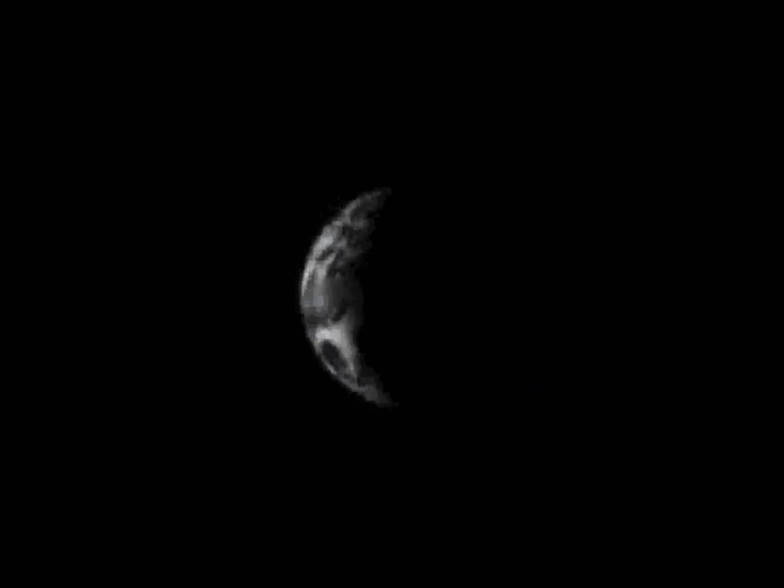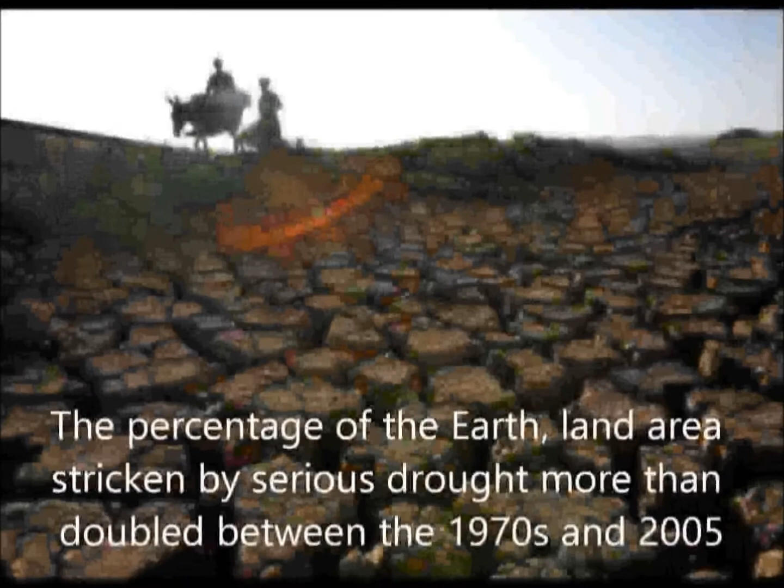Only 1.4 billion people have no access to clean fresh water. The situation in Africa is much more critical. In Africa it can be 4 miles to reach a water source. Africa is considered the most arid continent. African deserts make up more than 25% of the geography in Africa.

Mention the oldest desert in the world. The Namib Desert. The Namib stretches for more than 2,000 kilometers along the Atlantic coasts of Angola, Namibia, and South Africa. It has less than 10 millimeters of rain annually. Complete aridity is the best description for this desert. Obviously life here is too difficult.

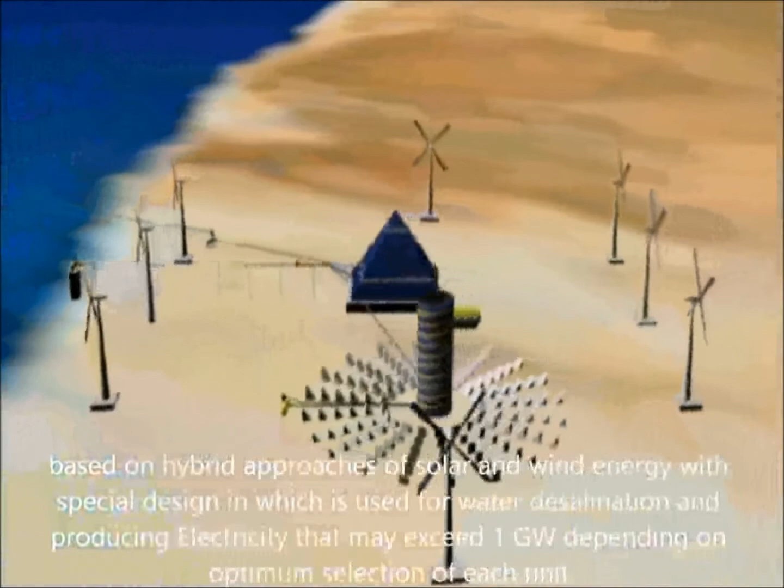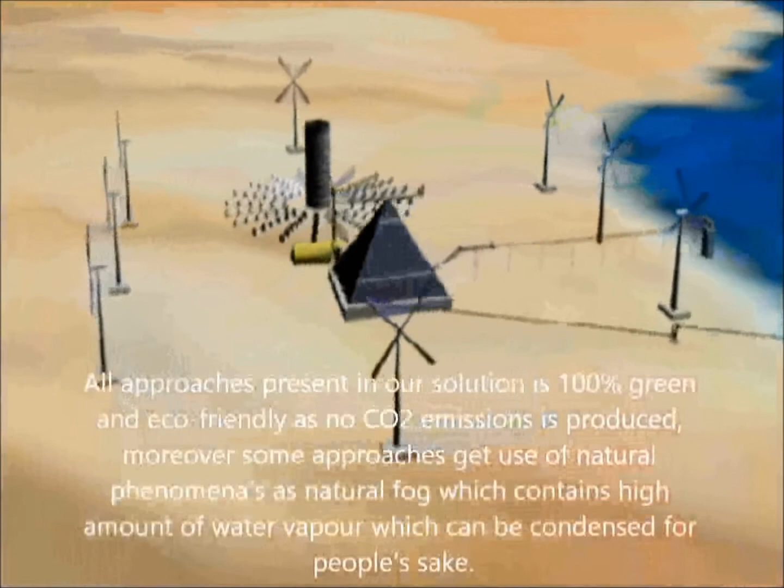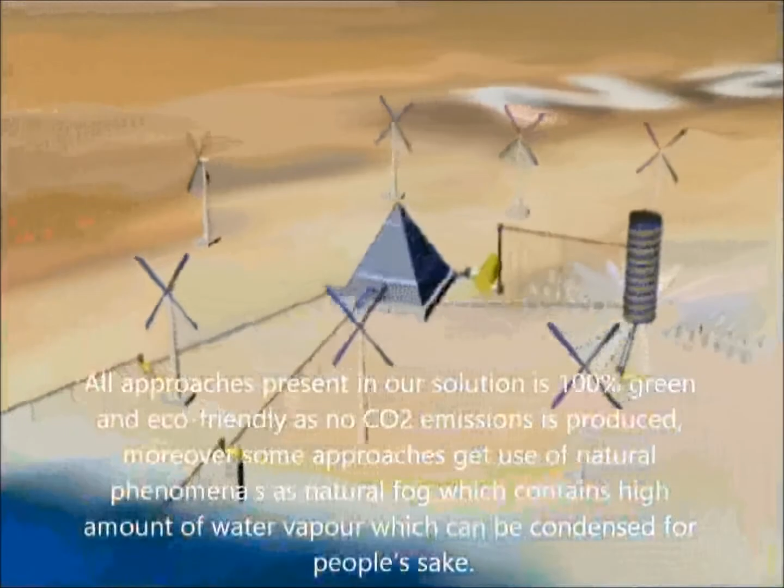Based on hybrid approaches of solar and wind energy with special designing, which is used for water desalination and producing electricity that may exceed 1 gigawatt, depending on optimum selection of each unit. All approaches present in our solution are 100% green and eco-friendly as no CO2 emissions are produced. Moreover, some approaches make use of natural phenomena such as natural fog, which contains a high amount of water vapor which can be condensed for people's sake. Now let's see what we have here.

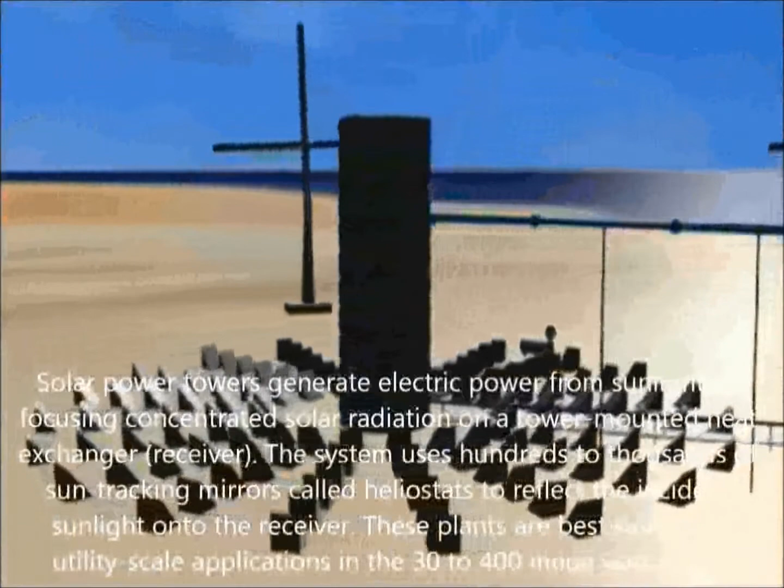Solar power towers generate electric power from sunlight by focusing concentrated solar radiation on a tower-mounted heat exchanger, the receiver. The system uses hundreds to thousands of sun-tracking mirrors called heliostats to reflect the incident sunlight onto the receiver. These plants are best suited for utility-scale applications in the 30 to 400 megawatt range.

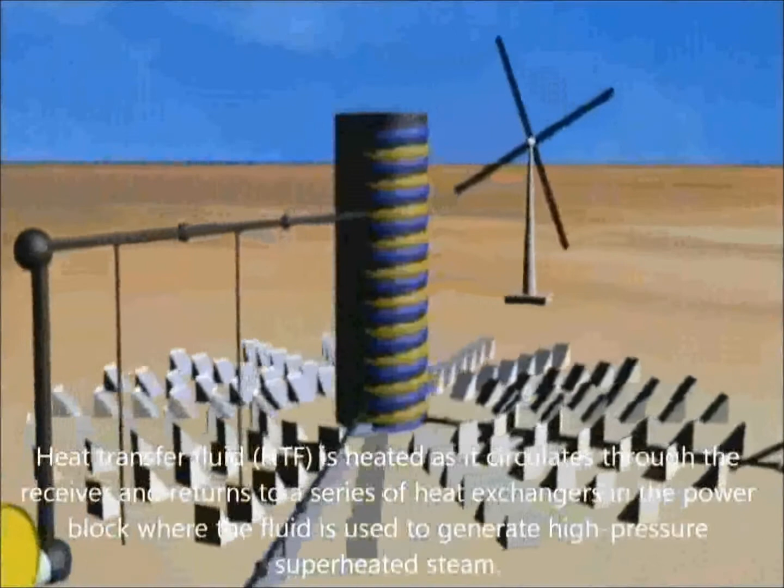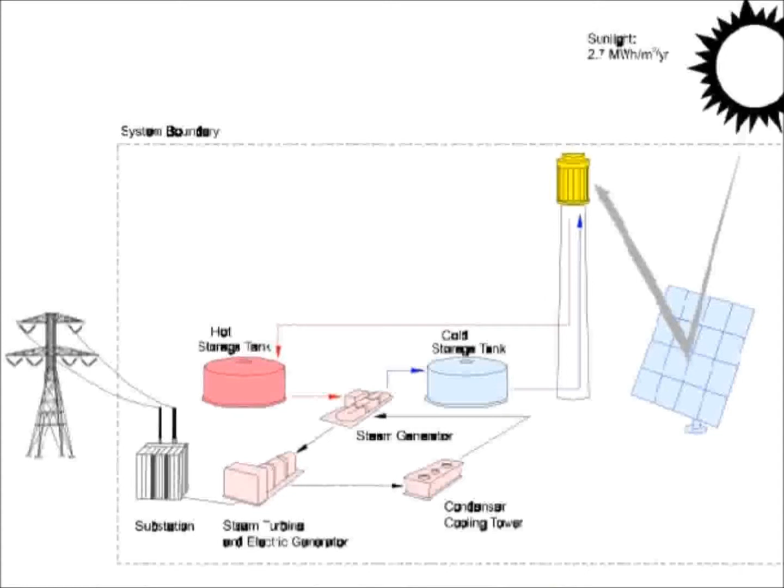Heat transfer fluid, HTF, is heated as it circulates through the receiver and returns to a series of heat exchangers in the power block where the fluid is used to generate high-pressure superheated steam. The whole process of producing superheated steam is shown in this diagram here. The superheated steam is then fed to a conventional reheat steam turbine generator to produce electricity.

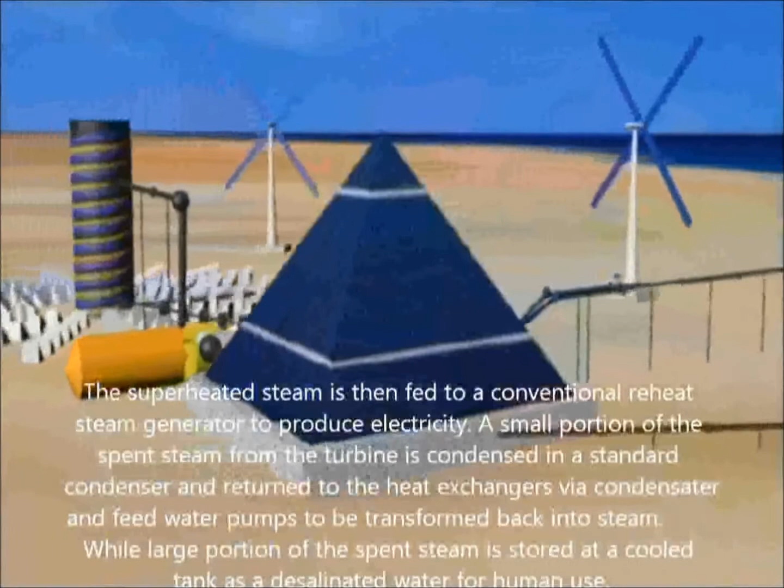A small portion of the spent steam from the turbine is condensed in a standard condenser and returned to the heat exchangers via condensate and feed water pumps to be transformed back into steam, while a large portion of the spent steam is stored in a cooled tank as desalinated water for human use.

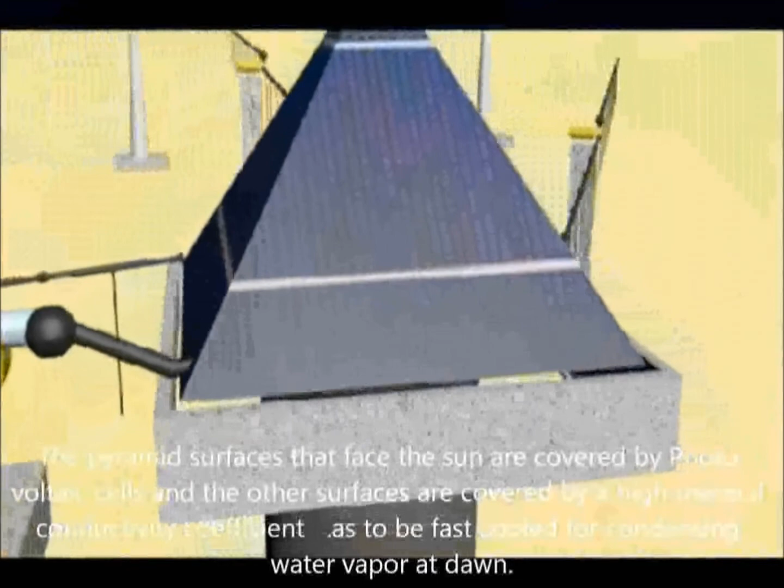The pyramid surfaces that face the sun are covered by photovoltaic cells and the other surfaces are covered by a material with a high thermal conductivity coefficient so as to be fast cooled for condensing water vapor at dawn. If we look deeper into the pyramid we can see the tank for desalinated water from the condenser chamber or the residual water from the process of steam producing. The condenser chamber where the steam is condensed.

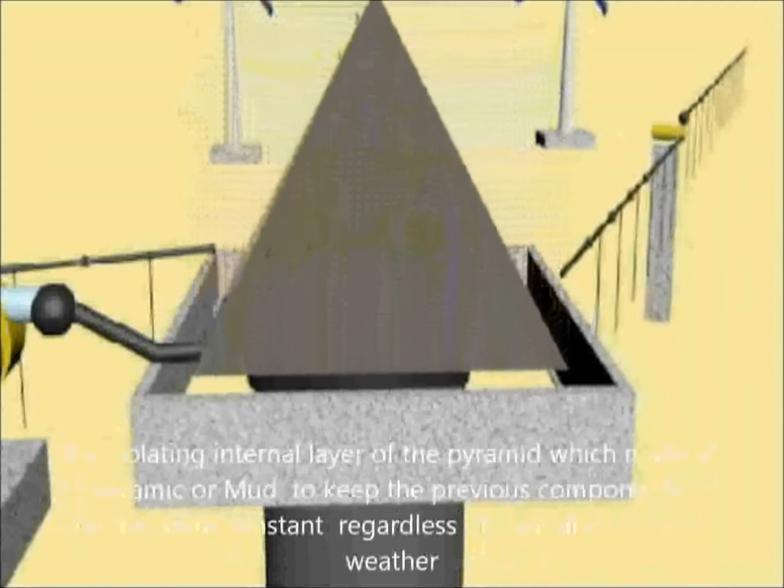The chiller to optimize the temperature of the tank and the whole isolating internal layer of the pyramid. The cover of the tank to keep it clean and protect it from insects, sand and impurities. The batteries, inverter, controllers and other switchgear for the electrical system which will provide the whole area with electrical power. The isolating internal layer of the pyramid, which is made of ceramic or mud to keep the previous components' temperature constant regardless of the variations of the weather.

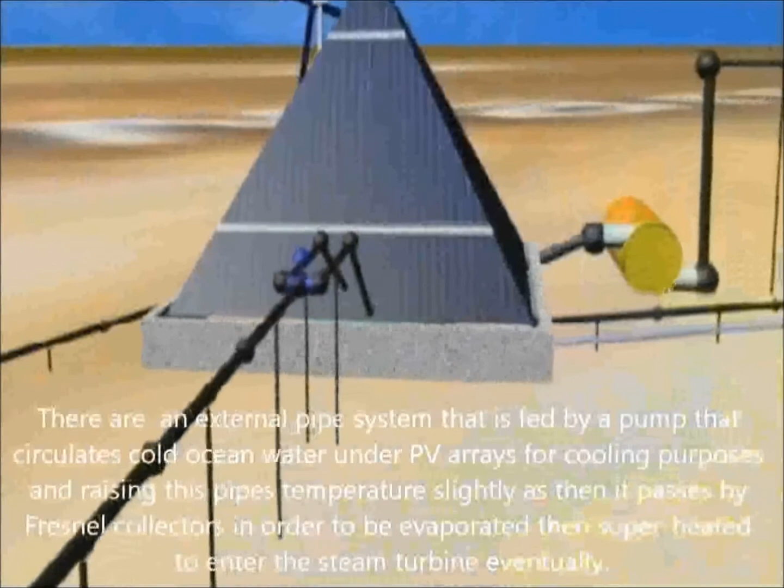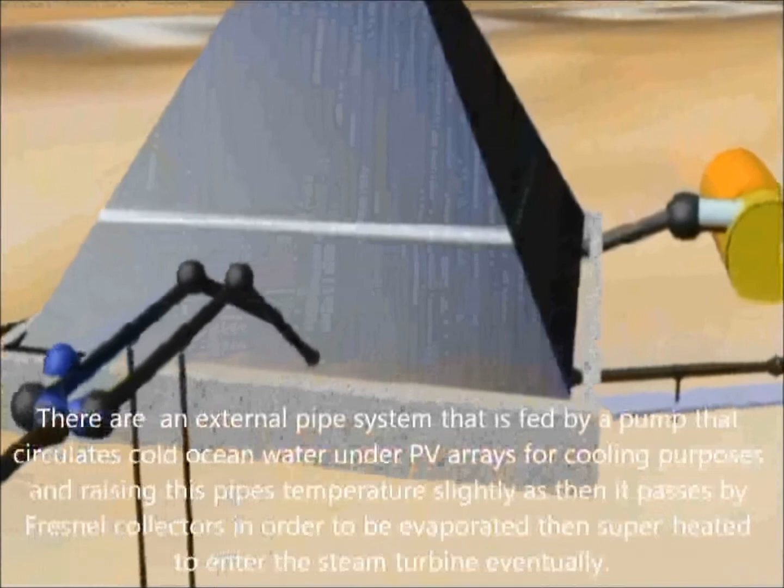There is an external pipe system that is fed by a pump that circulates cold ocean water under PV arrays for cooling purposes, raising this water's temperature slightly as it then passes by Fresnel collectors in order to be evaporated, then superheated to enter the steam turbine eventually.

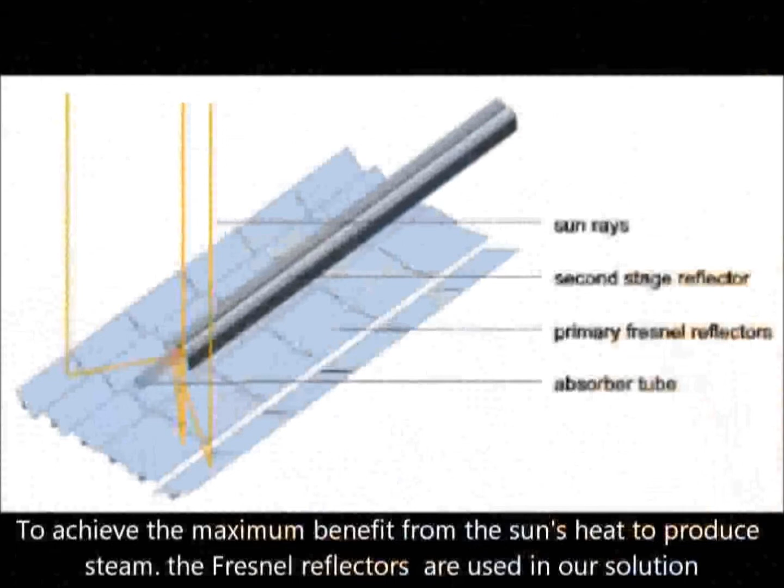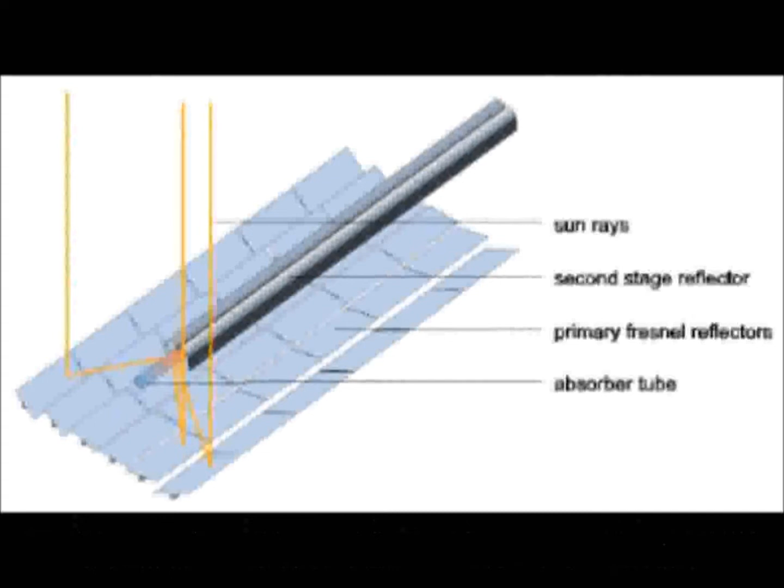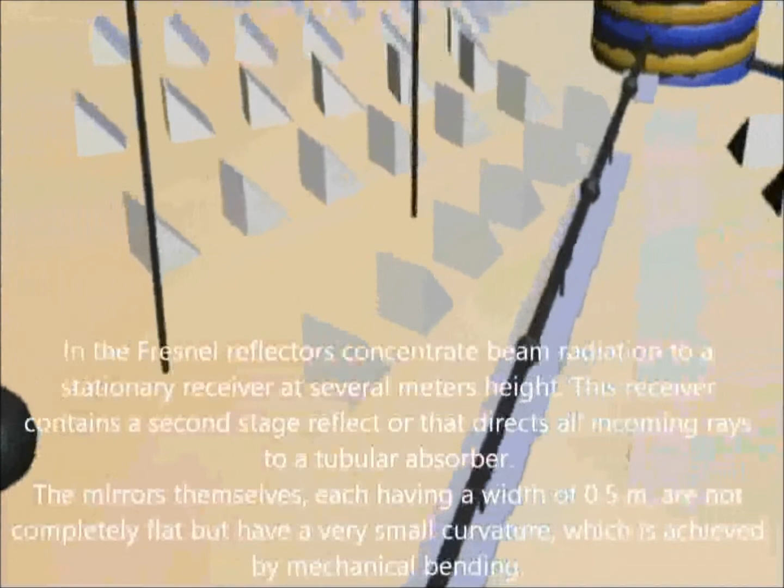And to achieve the maximum benefit from the sun's heat to produce steam, Fresnel reflectors are used in our solution. The Fresnel reflectors concentrate beam radiation to a stationary receiver at several meters height. This receiver contains a second stage reflector that directs all incoming rays to a tubular absorber. The mirrors themselves, each having a width of 0.5 meters, are not completely flat but have a very small curvature, which is achieved by mechanical bending.

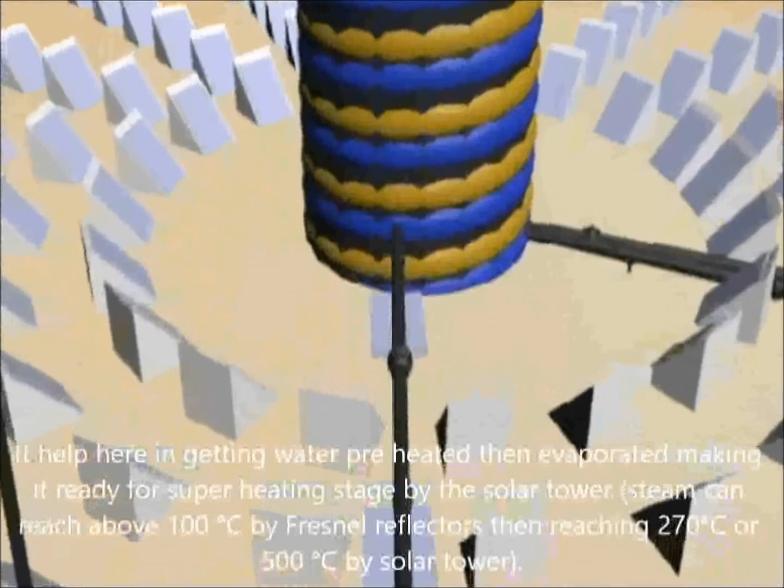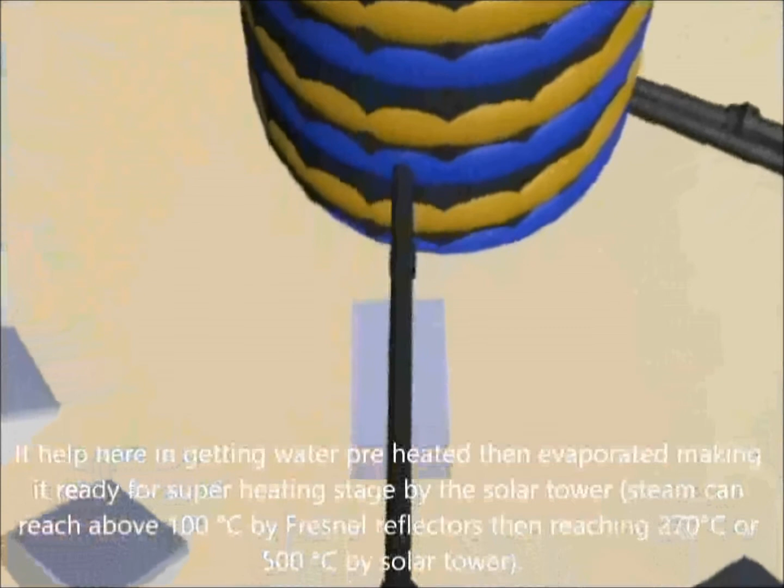It helps here in getting water preheated then evaporated, making it ready for the superheating stage by the solar tower. Steam can reach above 100 degrees Celsius by Fresnel reflectors, then reaching 270 degrees Celsius or 500 degrees Celsius by the solar tower.

There is a newly discovered water source that could supply half of Africa's driest sub-Saharan country with 400 years of water. The new aquifer flows under the border between Angola and Namibia, covering an area of about 43 miles by 25 miles on Namibia's side. The water is up to 10,000 years old and cleaner to drink than many modern sources.

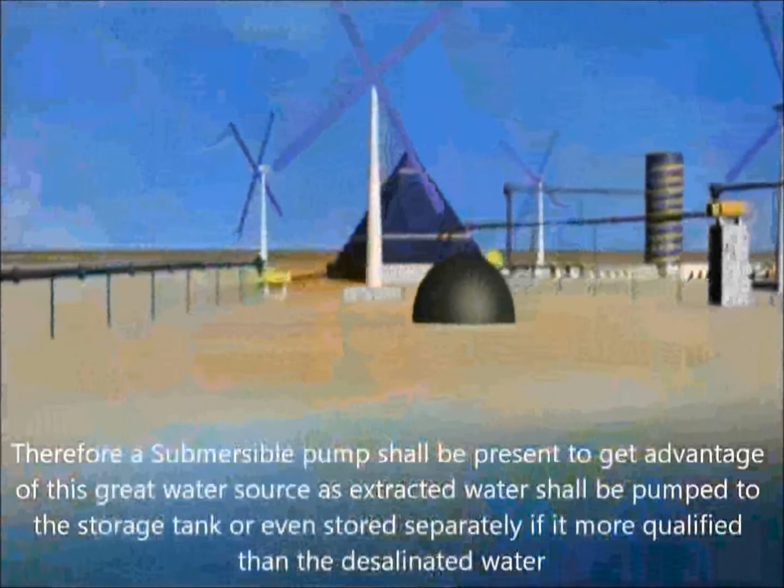Therefore a submersible pump shall be present to take advantage of this great water source, as extracted water shall be pumped to the storage tank or even stored separately if it is more qualified than the desalinated water.

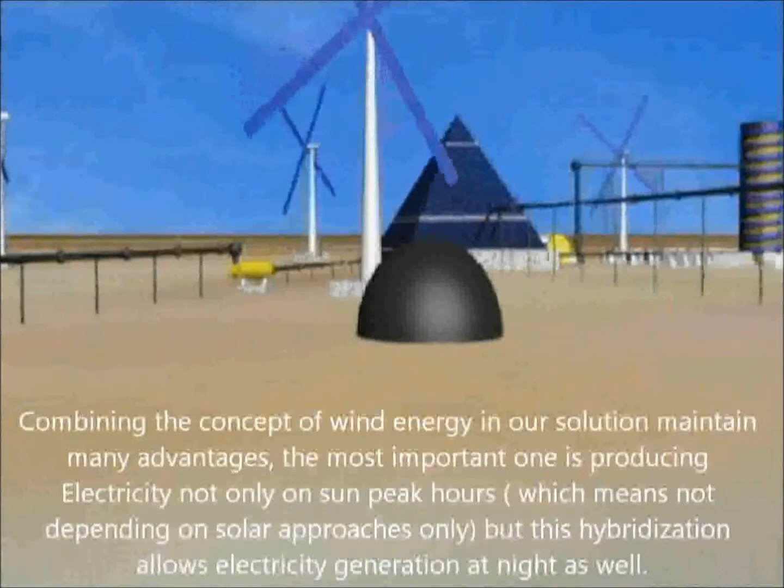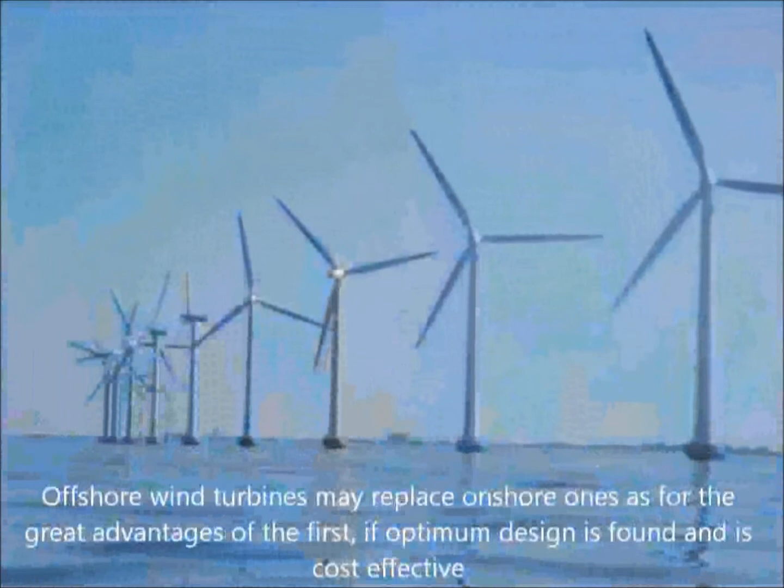Combining the concept of wind energy in our solution maintains many advantages. The most important one is producing electricity not only on sun peak hours, which means not depending on solar approaches only, but this hybridization allows electricity generation at night as well. Offshore wind turbines may replace onshore ones for their great advantages, if an optimum design is found and is cost effective. Now let's see how it works.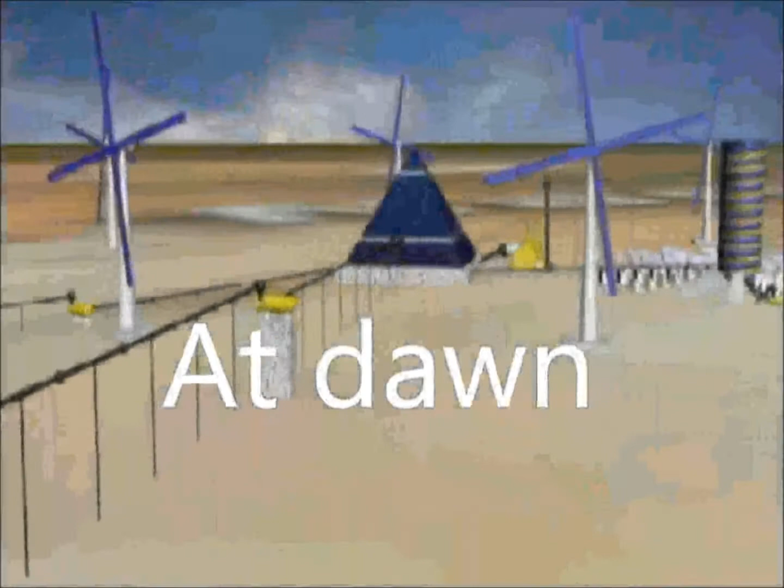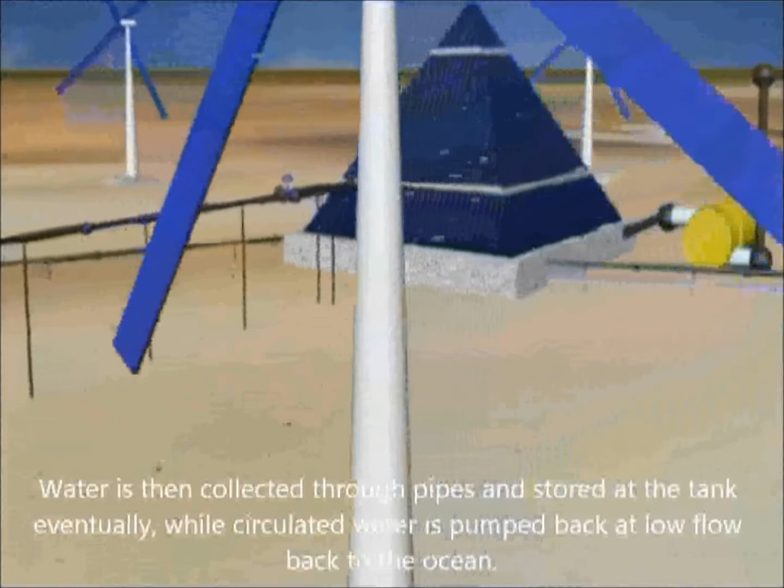The wind farm operates as a hood to create a low pressure area to collect the dew. Pumps withdraw cold ocean water below 9 degrees Celsius, allowing it to circulate under PV panels, so it cools them down. Hence dew is formed on their surface resulting from the enormous fog present in the early morning. Water is then collected through pipes and stored at the tank eventually, while circulated water is pumped back at low flow to the ocean.

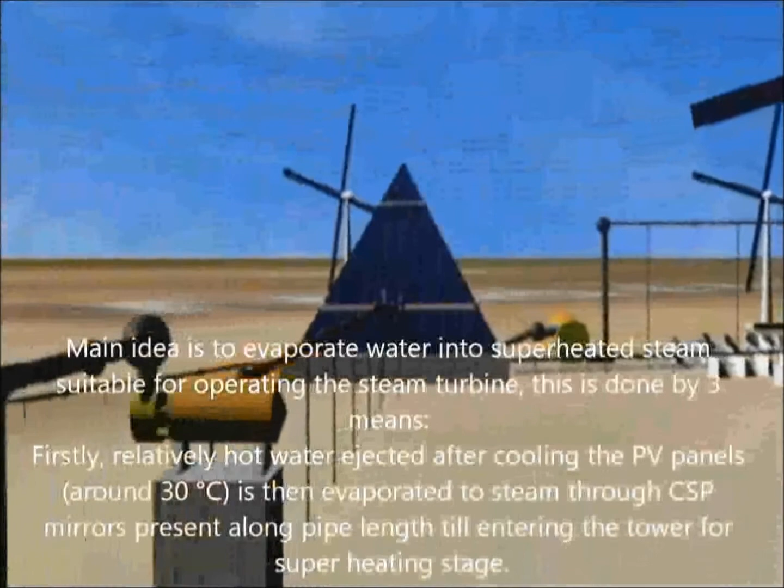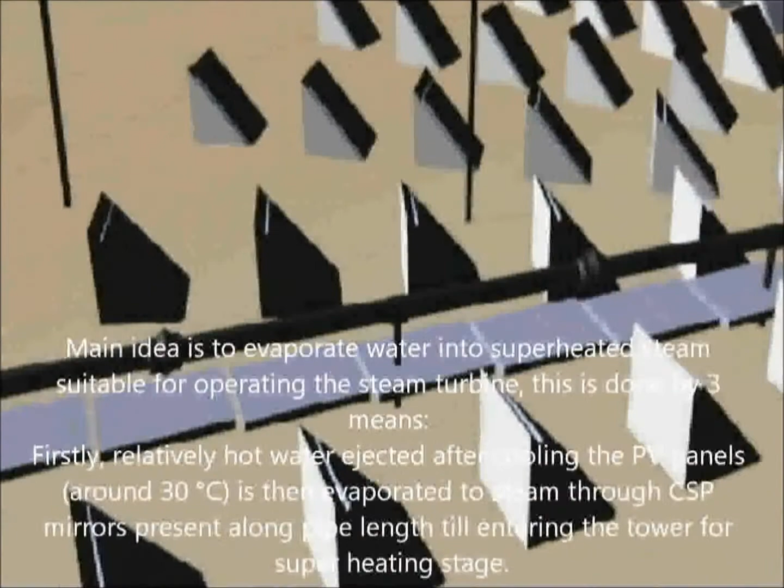At noon, the main idea is to evaporate water into superheated steam suitable for operating the steam turbine. This is done by three means. Firstly, relatively hot water ejected after cooling the PV panels, around 30 degrees Celsius, is then evaporated to steam through CSP mirrors present along the pipe length till entering the tower for the superheating stage.

Secondly, heliostats collect incident solar radiation then reflect it back to the receiver at the top of the tower. This energy is used to heat oil, the heat transfer fluid, then through a heat exchanger the heat is transferred to the water pipe, providing superheating for the steam. Thirdly, normal solar radiation falls on the tower, as both oil and steam pipes are on the outer surface of the tower.

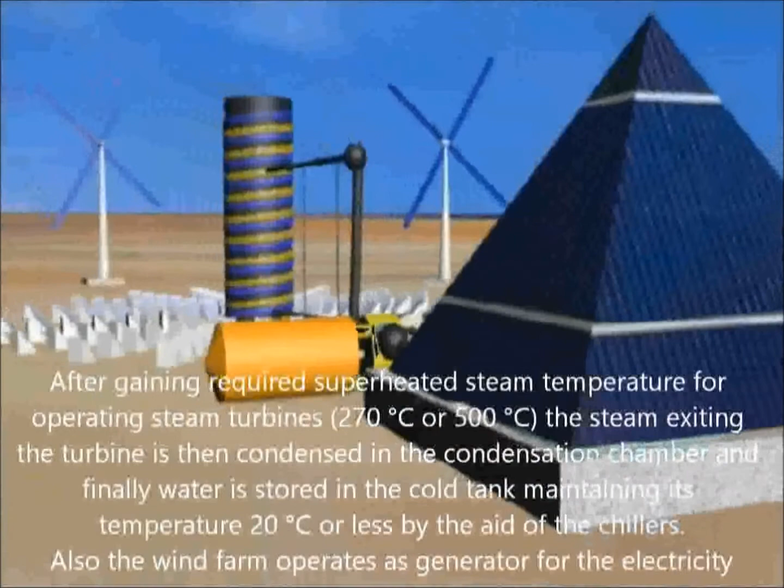After gaining the required superheated steam temperature for operating steam turbines, 270 or 500 degrees Celsius, the steam exiting the turbine is then condensed in the condensation chamber and finally water is stored in the cold tank, maintaining its temperature at 20 degrees Celsius or less with the aid of the chillers. Also the wind farm operates as a generator for electricity at this time.

At night, the main aim is to prepare the pyramid for the dawn by cooling it down such that the maximum amount of dew is formed on its surface, hence more water is gained. This is done by two means.

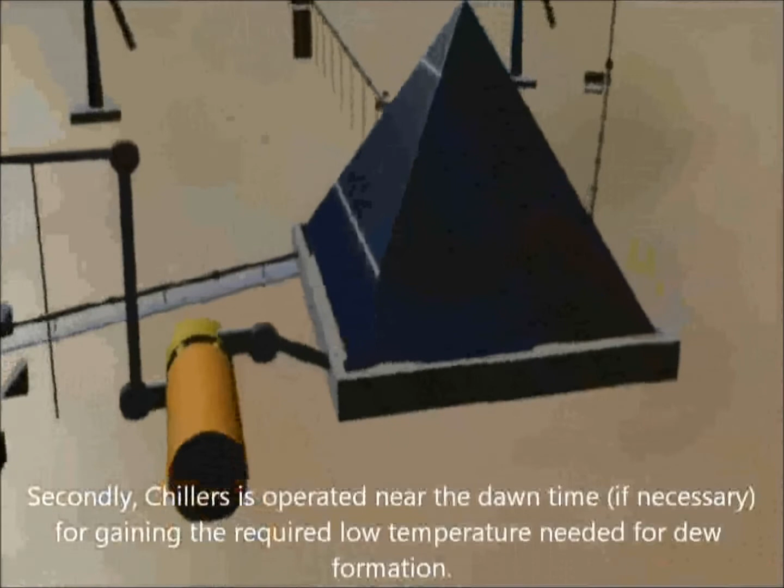Firstly, the pump will withdraw ocean water below 9 degrees Celsius, and a two-way valve is operated such that water is circulated on both the external and internal pyramid surfaces, cooling them down, then water is pumped at low flow back to the ocean. Secondly, chillers are operated near dawn, if necessary, for gaining the required low temperature needed for dew formation. Although this desert is considered one of the most arid places in the world, its geography and tough climate represent the key for this solution.

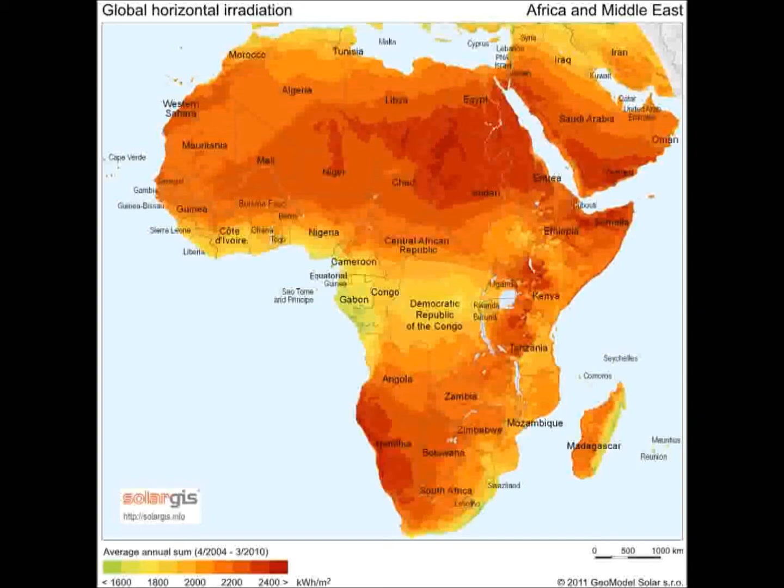Talking about solar energy. The solar radiation on Namibia's coast ranges between 2400 and 2500 kilowatt-hours per square meter and even more. So solar energy is most probably the best renewable energy approach here. Therefore, our solution contains an integrated collection of different solar technologies like PV, CSP and solar water desalination techniques.

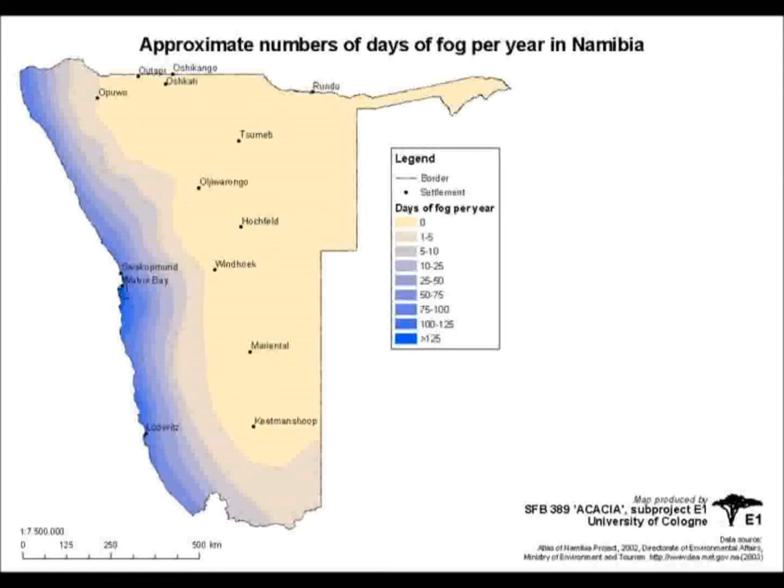Also, the frequent fog currents across the coast play a very effective role in the water harvesting process. As the whole coast of Namibia has more than 125 days of fog per year, we can ensure the existence of desalinated water from this natural phenomenon most of the year, which means lower dependence on electricity for getting water heated and then condensed. Not to mention the newly discovered groundwater in the north of Namibia.

In summary, water, electricity and air pollution reduction are considered the world's most ongoing demands, especially in Namibia. This solution will be a clean source of pure desalinated water as well as green renewable energies for the sake of Namibian people. Generally, this solution will be the core of development in Africa, which needs more care from the world. This is our vision. This is the center of life.